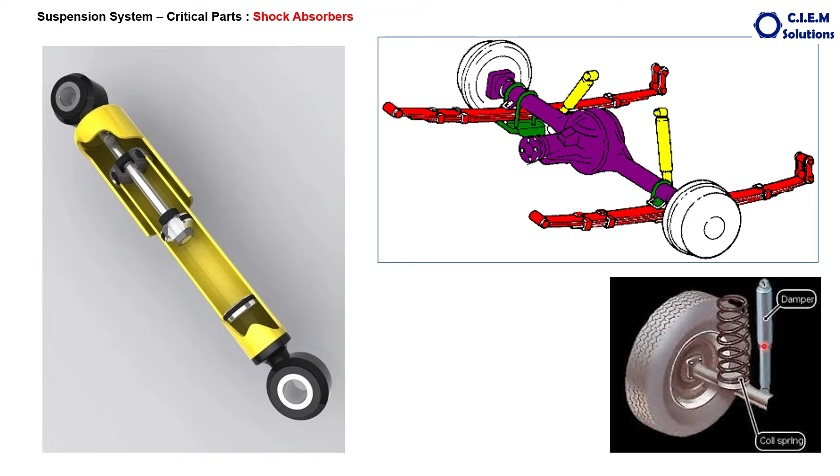Any vehicle, 99% of the vehicles which are connected with leaf springs or coil springs, are compulsorily fitted with these shock absorbers. Together, the spring and shock absorber do the job of vibration dampening or absorbing the shocks. Another important job of the shock absorber is to always ensure that the tire has proper grip with the road at all times.

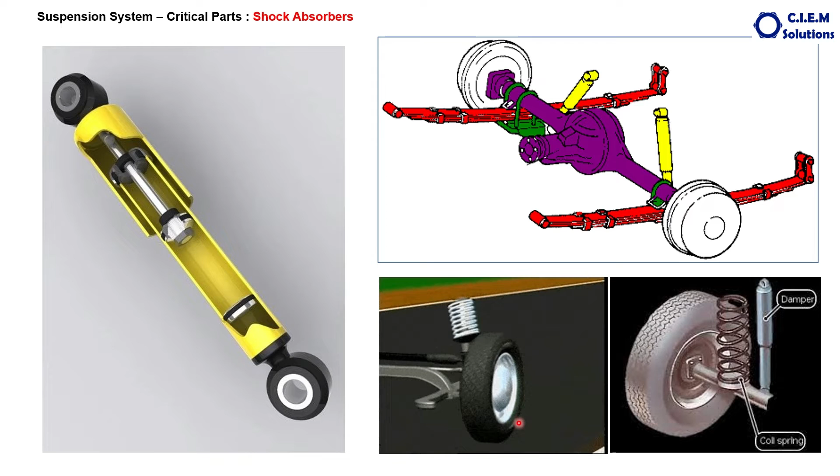There are two types of shock absorbers we can see in commonly used vehicles. Type 1 is called the monotube, meaning single tube shock absorber, which looks like this. The other type is called the twin tube shock absorber.

If you look into the construction of the monotube shock absorber, these two figures indicate both are monotube shock absorbers only. The difference is the mounting. This one has a rubber mount which can be mounted to the frame. This one has a bushing which can be mounted through a pin.

You can see the construction of the monotube shock absorber: a container or tube to hold the hydraulic fluid, and also the compressed nitrogen. Compressed nitrogen is used as the gas here because nitrogen is not flammable like oxygen. So oxygen is not supposed to be used because it is flammable. This is nitrogen. Then there will be a piston.

This is a pressure piston or floating piston with a seal. The purpose of the seal is to prevent leakage of the gas from this chamber to that chamber, and to prevent leakage of the fluid from the upper chamber to this one. There will be one more piston connected to the piston rod. This also has a seal, and restricted ports or valves are provided on this piston.

This end is connected to the suspension arms, the moving or reciprocating arm. The other end is connected to a fixed item of the vehicle, either the chassis or the frame.

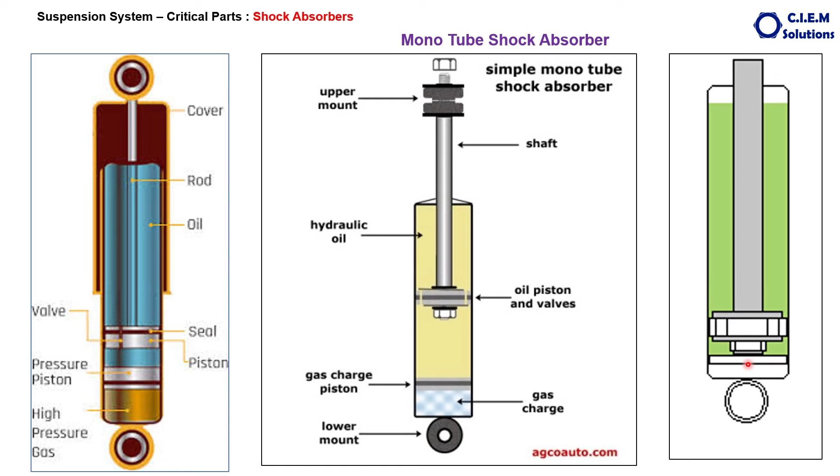This is the animation. Imagine this is the fluid chamber, this is the gas chamber, and this is how it works. Now let us move to the shock absorber.

The construction of the twin tube shock absorber is also identical, function is also identical, except for some change in design. Observe this twin tube shock absorber. Instead of having one tube to contain the fluid, it has two tubes - this is the inner tube, this is the outer tube. There is a chamber space provided, a circumference space between the inner tube and the outer tube. Both tubes - inner tube holds the fluid completely, whereas the outer tube, a portion up to a certain height, holds the fluid, and beyond that it holds the nitrogen gas.

A seal is provided to separate the nitrogen gas and the fluid. This is the piston rod, this is the main piston, this is called the foot valve. It is not a floating item as we have seen in the case of the monotube shock absorber. This is the fixed one, but it will be having a foot valve.

What happens when the spring is compressed? The pressure acts on this piston rod, making it travel downwards. When it travels downwards, the pressure acts on this piston, which makes the fluid travel from the lower chamber to the upper chamber through the restricted flow in this piston. Simultaneously, a portion of oil moves from the lower chamber to the outer chamber, the space between the inner tube and outer tube. A portion of oil goes from lower chamber to outer chamber through this foot valve via a restricted flow. So oil is being displaced from the lower chamber to two other chambers, upper and outer, in a slow and steady manner. Simultaneously, when the oil level increases here, the pressure acts on the gas.